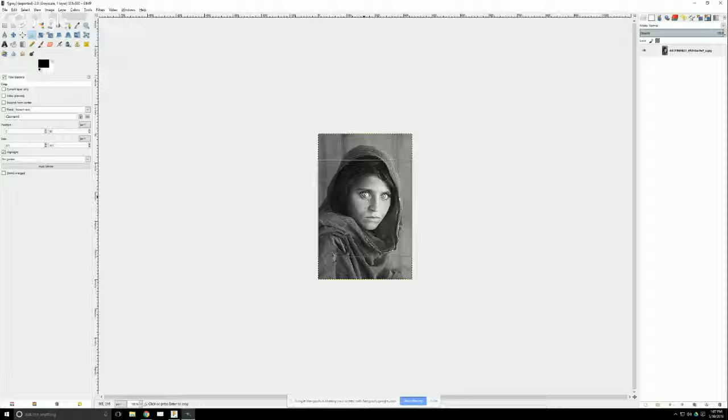Mesh Mixer for this process is better when you use a square image. So I'm going to drag that down. Now I'm just going to click on the image to make the cut, and I'm going to say export as gray square. Great, so we don't need GIMP anymore. We'll get rid of that and this.

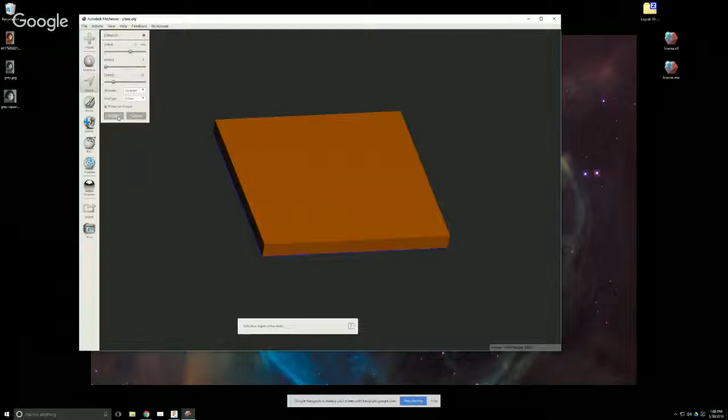I'll bring up Mesh Mixer. Expand this out a little bit. And maybe we'll just start with a plane right here. It says import plane, and this is infinitely thin. So what I want to do is select the whole thing and extrude it out a little bit. If I press W, we don't have very many triangles here.

So I go over this in the Mesh Mixer class, but I'm essentially going to remesh this maybe a couple of times to make it really, really dense. The whole point of this is to make a very dense mesh to start off with, which will then have the picture pop out of it. So I remesh this a couple of times. That's a pretty dense mesh.

That's nice. So we're going to go into here to sculpt, to surface, and let me get rid of these other ones that I did. So we're going to go down here to sculpt, to surface, to stencils, and press the plus button right here, and navigate to where I saved this, and I'm going to select the gray square. So now in stencils, we can click on this image. I'm going to make my brush bigger.

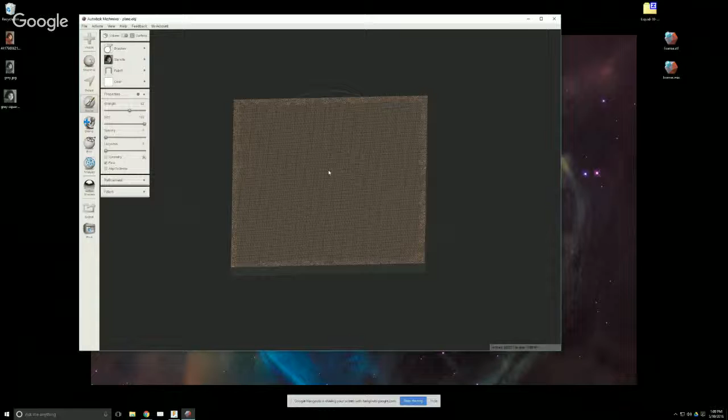And I'm going to go to maybe draw 3, like this, turn down strength a little bit, and click and see what happens.

If I turn wireframe off, you can see that from the front, that is kind of the girl. And if we zoom in here, you can see that it is kind of bumpy right here, but it is definitely the girl when we look face on. I'm going to undo that and go back in.

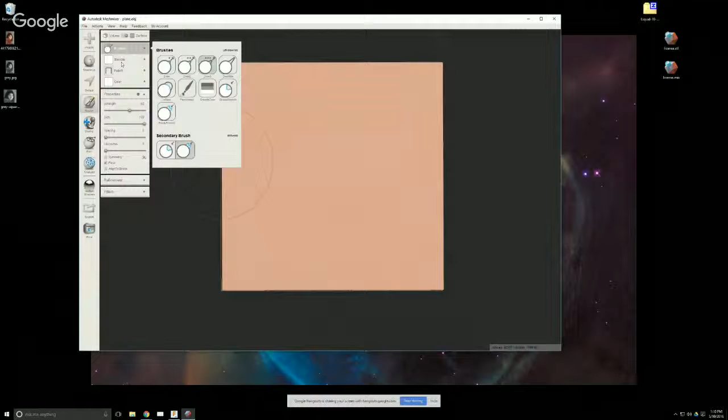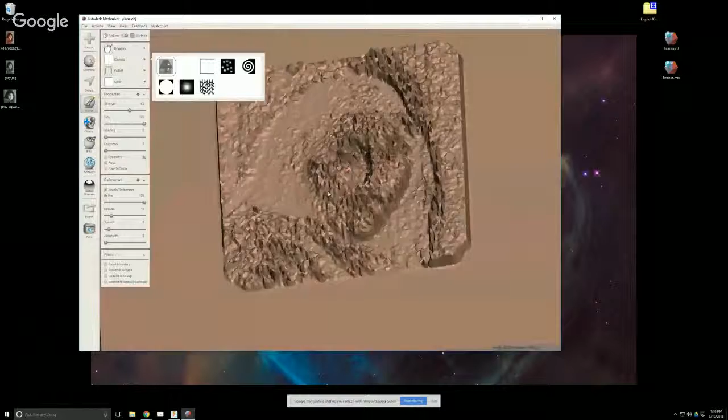Under refinement here, I have reduction turned down. I could reduce it a little bit if I don't want that much smoothing, and then try this again and pop her out like that. So that is definitely 3D printable, except some of these things might be pretty small, right, these little spires, but this is definitely something you can use to create all sorts of different patterns on your mesh. If we make this smaller, we might be able to see the detail a little bit more.

Right, her eyes are kind of popping out. So what this is, if you remember this square right here, let me drag this over, you can see that her hair is dark and her eyes are white. So in this, everything that is dark is staying down and everything that is light is popping out. If we do this stencil, you can see that it's dark on the right-hand side and light on the left. So when we do this, it comes out following that. The light parts come out, the dark parts stay down.

So that's one way to do it. But this isn't the best way to do it. There's a couple different ways.

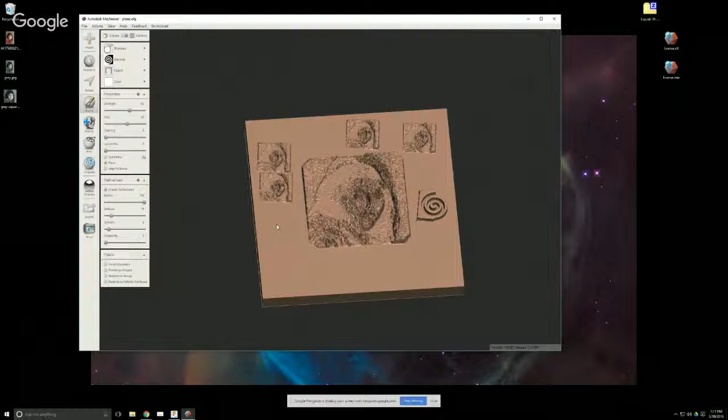If you have a 3D printer, you can open up this free slicer program called Cura that slices 3D models. If you go to File and Load Model, you can actually select an image, and it asks you how tall you want it to be, 10 millimeters, with a 1 millimeter base, and for it to be 99 by 99 millimeters.

And maybe do a little bit of smoothing, and we could have a 0.5 millimeter thick base. You click OK, and it brings in the image, and it actually does a little bit better job than Meshmixer.

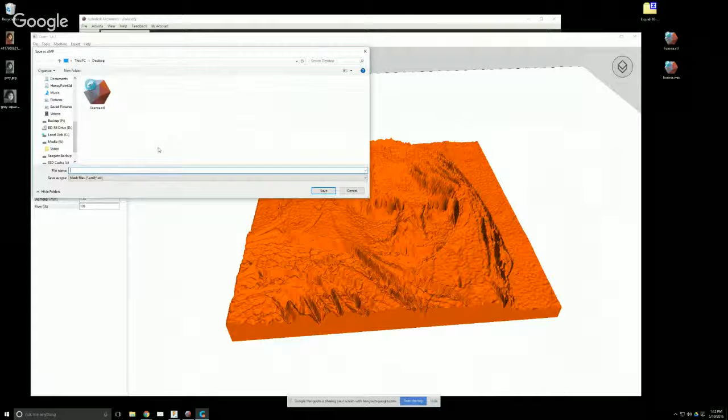And this is just a 3D model. So you can go to File, Save Model, and call this 'grayCura.stl'. Then after a second, it will load up as a 3D model, and now I'm opening it in Meshmixer.

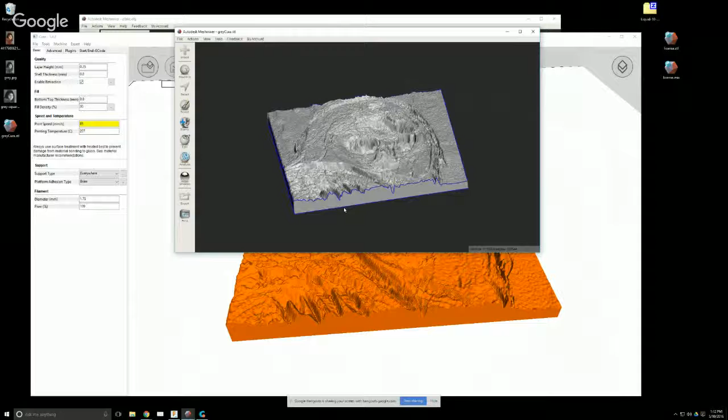Meshmixer will think about it for a little second, and there's the model ready for you to do whatever you want with. Notice that Meshmixer has shown some open boundaries essentially everywhere on here, so you might need to do a little bit of work to fix that, but it is something you can edit as well.

So that is one way to do it. Now the last way to do it is to go to a web page. Let me go here - this is a web page called 3dp.rocks, specifically 3dp.rocks/lithophane.

If you just go to 3dp.rocks, there are lots of different things you can do inside here - ring makers, but also this image to lithophane converter. So you click on this, and you get some options here.

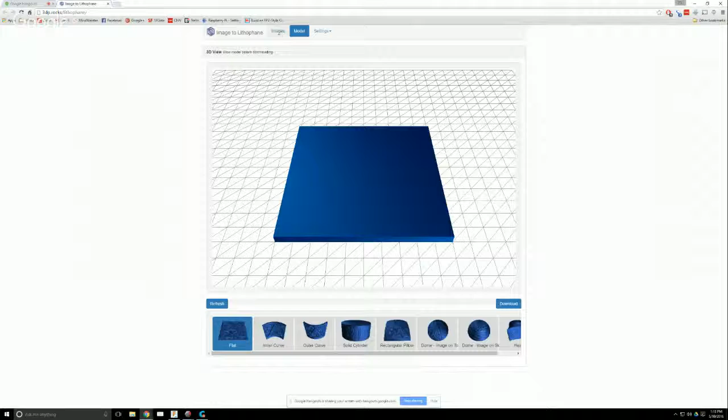If you click up here on images, it asks you to choose a file. So I'm going to choose maybe the square right here. It thinks about it for a second, and then it creates a lithophane here in your browser.

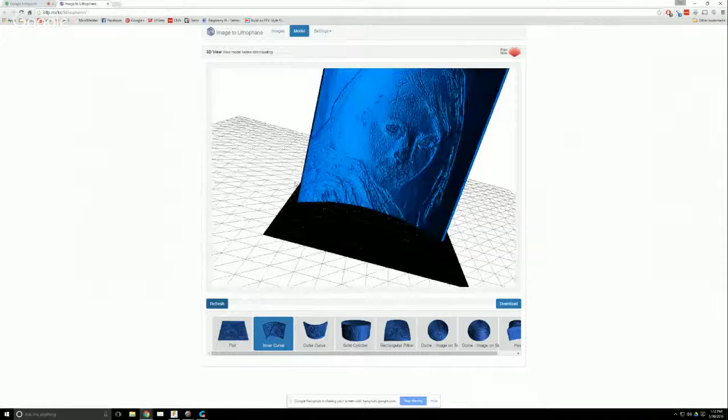You can also do other things, like inner curve, outer curve. So if we click on inner curve and say refresh, it thinks about it and creates a 3D model. And if you say download, it will download it, and you can open that up in Meshmixer as well.

Once it comes up after a second here, there we go. Now, these are probably not optimized for 3D printing - they may not let enough light through for creating something that would be 3D printed, but that is a way to create an image as well.

So hopefully that gives you some options on how to use some tools to create a 3D model out of an image. And then those are just 3D models - they can be used anywhere for anything, just like any 3D model could.

So the other thing I wanted to talk about today, which is something that happened in my own life, was I needed to hang some stuff up in my garage. And since I own a 3D printer, I thought, well, why don't I just create hangers for things? So I did, and I want to show you how I created those and how I went about that.

I have some different examples here. These are safety glasses, and I was just hanging these on a nail, but since I'm a 3D printy person, I wanted to hang these on something 3D printed. So I created a little hook like this - super duper simple, but it just goes on and these hook on like that. And then this gets screwed into the wall. So that's one that I'm going to be talking about.

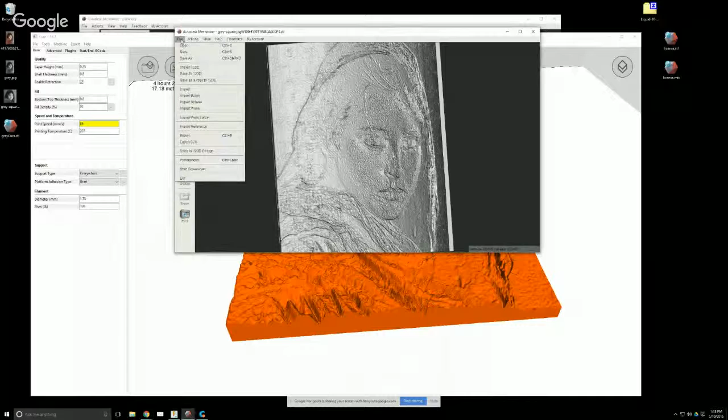Let me share my screen again and show you. Let me start like this, starting with nothing. I'll close all of these Meshmixers down.

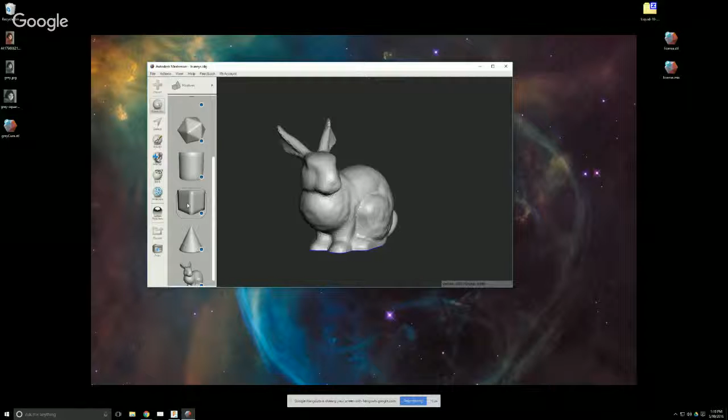Meshmixer doesn't allow you to just start with nothing, you have to start with something. So I said import bunny, but I'm going to get rid of the bunny later. I'll go here to Mesh Mix, down to a cube, and drag this into open space.

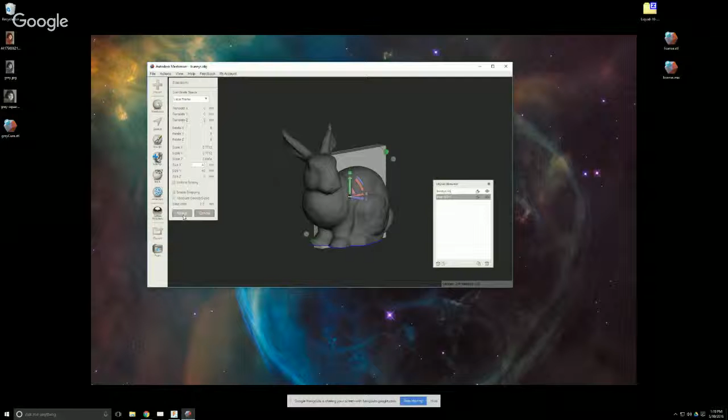Then it asks what size I want. I want this to be 40. It says it does everything uniform, but that's not what I want—I want 40 by 40 by something around 5 millimeters. And I'll say accept.

I can click on the bunny and click the trash can to get rid of it, then click back on this object. That's my plate, what I want to create a hook out of. This was as simple as going to the sculpt tool, to a draw brush, and making sure refinement and reduction are all the way up.

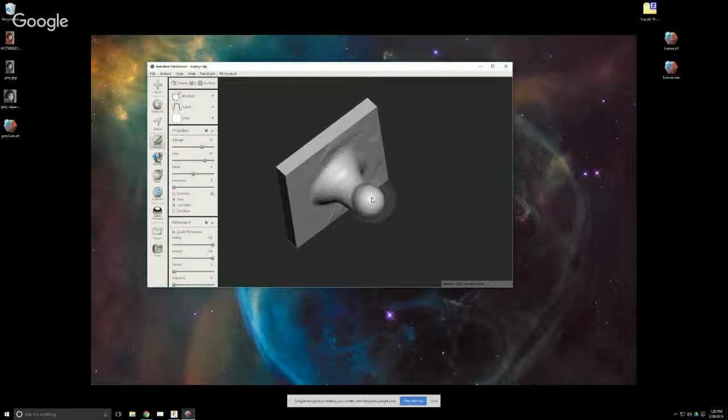Then just starting to click and draw this outwards. If you hold this down, flow is turned on. Holding it down builds outwards. I'm going to hold it down a bit more until it looks proportionally correct, and now go up a little bit like that.

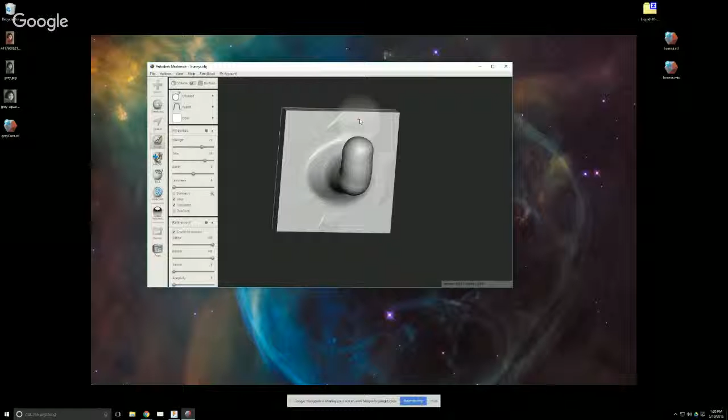If that isn't too good, you can hold down the control key and it undraws, so it goes down, and you can keep refining it that way until you get what you want. You know this is about right because you know this square is 40 by 40, so proportionally it looks right.

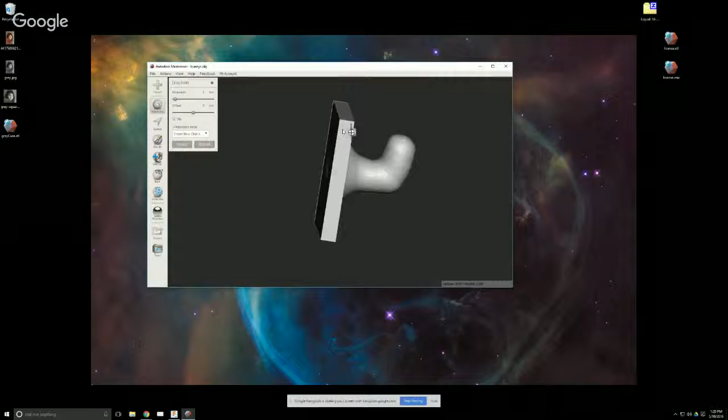We can go here to Meshmixer, and this is a cylinder. We can drag a cylinder onto the model and say dimension, to make this dimension around 3 millimeters or so. It's a little tiny bit off, so you can drag this around and then say accept.

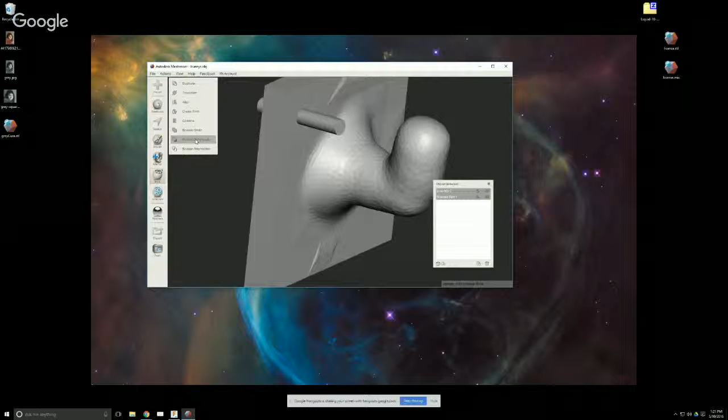And transform this—I'll make it much bigger so it cuts all the way through my object. Select my object, select the cutting tool, and do a Boolean difference. I would have done a bit more remeshing if I were doing it for real, but that's kind of the workflow.

That cut a hole through that plate for a screw to go through later. And go back—so that's just a quick overview of how to use Meshmixer to create something organic.

Now I want to use another couple of examples in Fusion to show you how I made those two things, for the vacuum and for the butane torch, because those are a little more complex but also pretty useful.

So let me go into and share—let me bring up Fusion here. I think I'll just try sharing the Fusion window if I can do that. There we go, you can see it. Good.

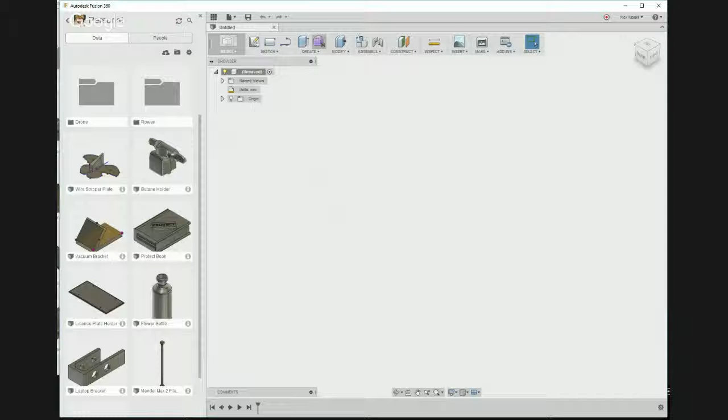So what I did to create the vacuum bracket, you can do this a couple of ways. Certainly the easiest way is to create a sketch and just draw the bracket. You can do this in any way you want. Say the bracket needs to be these dimensions on the wall, and then with a line, the bracket needs to come up here at this angle and then come down.

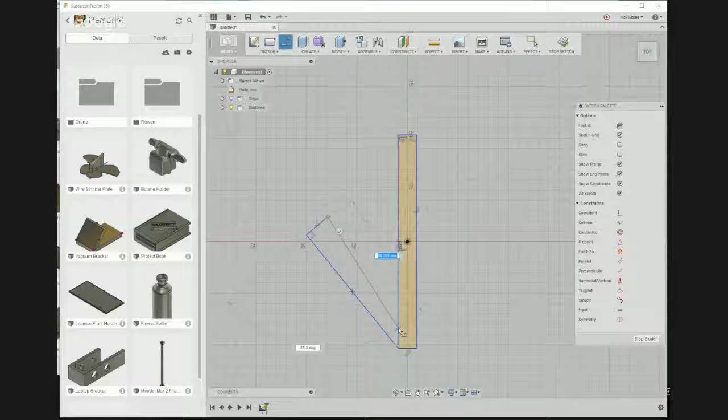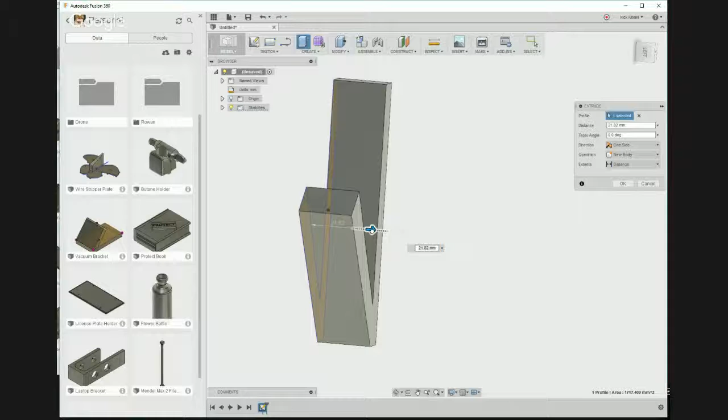And if you want to be real fancy, you could go in and trim this little line in here, like that. So now you have a bracket like this, and you just right click on it and say extrude. This would match what angle you'd need to go into your vacuum that you measured. So that's certainly one way to do it, but I want to show a different way.

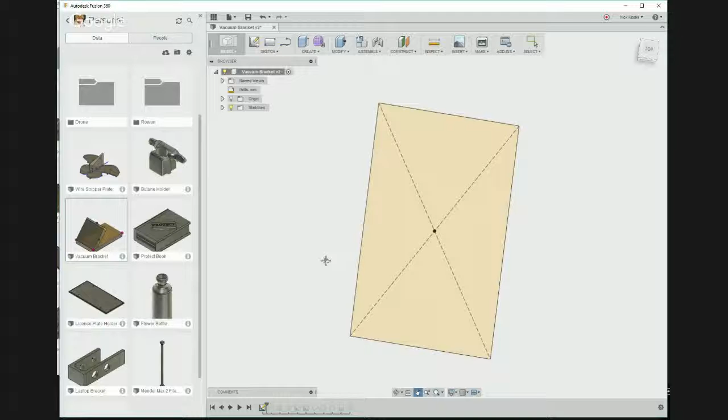So I'll load up the vacuum bracket here. First I started with what I wanted to go on the wall. And next I extruded that out, right? So I started with a sketch and then I extruded that out.

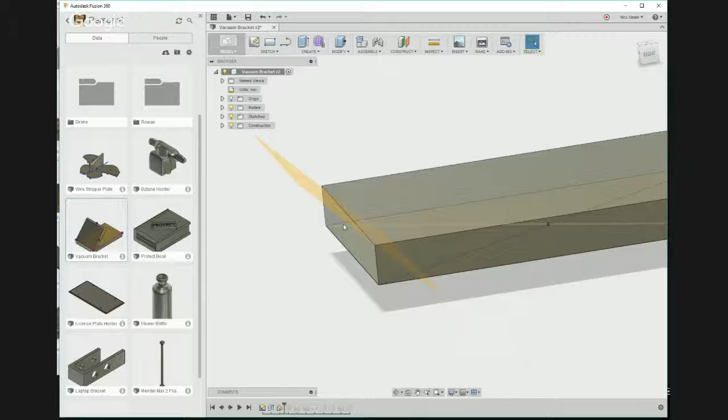And then I created a plane at an angle. I knew I wanted this to end up somewhere over here, so I used this edge down here and went to construct plane at angle. I made this plane at a specific angle that I thought would work. And then I created an offset plane from this plane, so I moved this plane out.

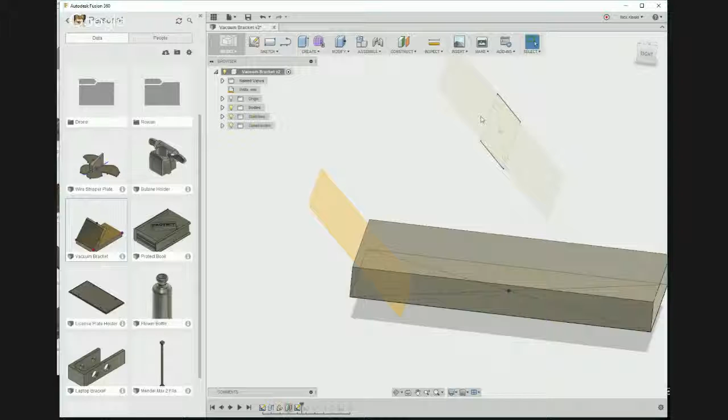I drew the end result on this plane, what the end of the bracket would be. I drew a square on the bottom of this bracket, the bottom of the wall plate. And then I did a loft, lofting those two things together. Then I added some nice things like little fillets down here to make it a little bit stronger of a material, and up here to make it a little bit nicer.

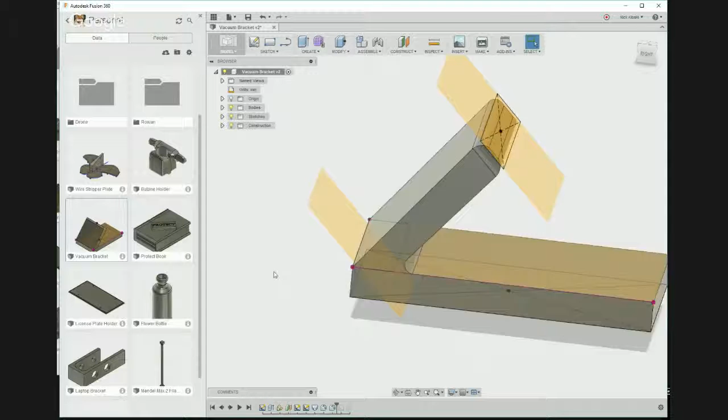The reason I did that was if I wanted some sort of swooping transition, you can do that with a loft. You can loft from this plane to another plane to another plane to another plane if you wanted, and have it kind of be nice and wavy. You could certainly do this with just a side profile sketch, but I wanted to figure out how to do this with lofting, which is why I did it that way.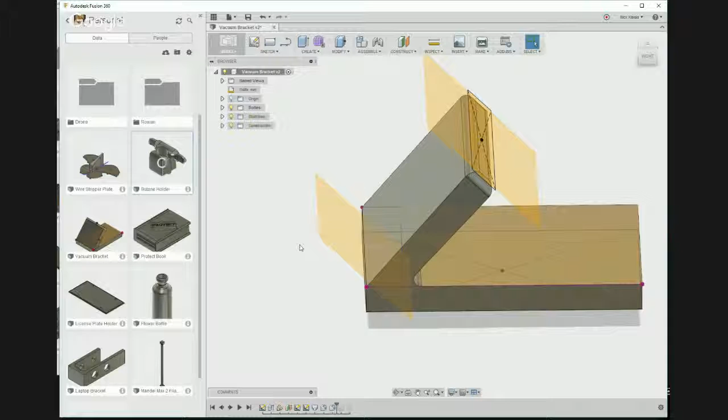So let's go into the butane holder, which was the torch. Let this load up for a second here. There we go. I'll get rid of the vacuum bracket. So this was the torch holder.

This was actually not that hard to do. What I did with this is I knew I wanted the torch to be upright. So I just took my digital calipers and measured what width it was. This looks about 25 millimeters, a little bit thinner on this side, about 20 millimeters. And then I knew I wanted it to go up maybe about 40 millimeters, so it was a nice secure connection.

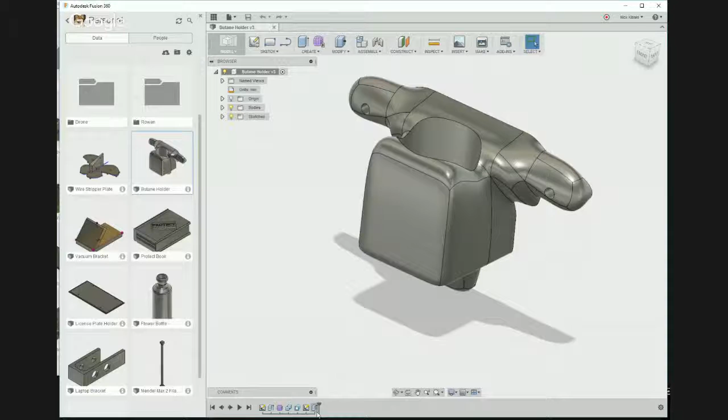So I'll go back and share my screen. That's what I did here. I started off with a sketch, let me go back to the beginning here. This is the shape, this is an ellipse, the shape of the butane torch.

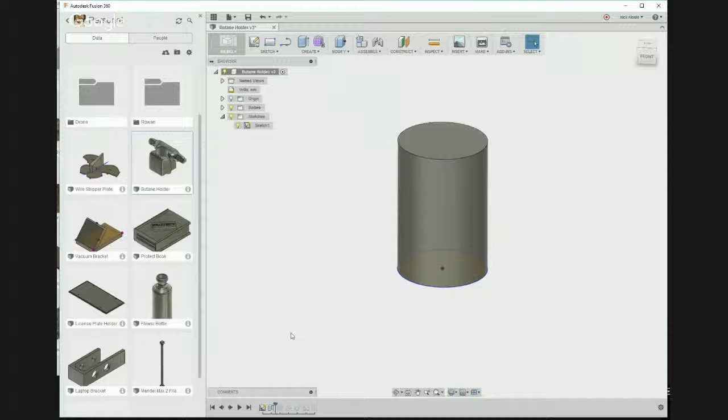I then extruded that out. I don't need to make it look like the torch because all I care about is just the shaft of it, the part that will be cut out of the other object to the length that I want. And then I went in and created an object in the sculpt environment.

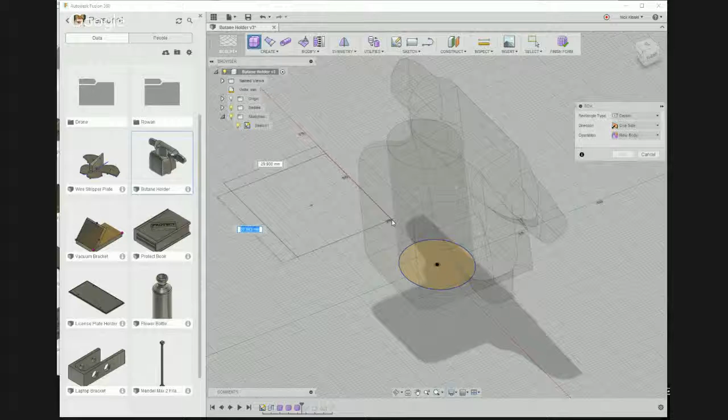I just started off with a box, kind of like an actual finished form. Let me create a box. So I just started with something vaguely the size and tall that I wanted, and I made it a little bit more defined.

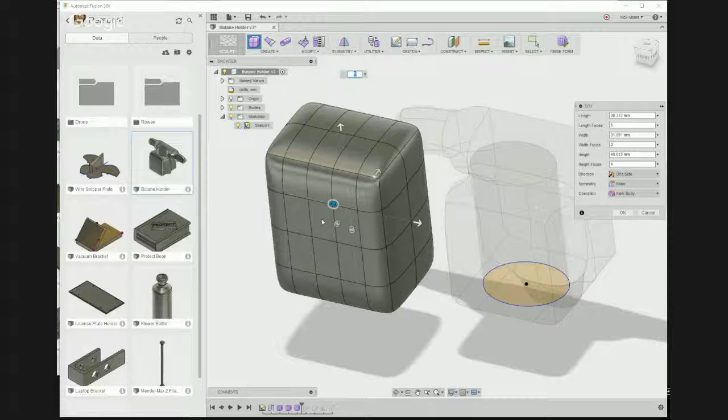Now, best practice with this is that you always have an even number of faces, because that gives you a line in the center across which to mirror. If we went one more, you see there's no real line here and the mirroring gets kind of weird. So, something like that.

And of course, this would be on top of that circle, so you'd be able to model to that. But I use the trick of selecting - actually, let me turn on symmetry. I want the left and right to be the same.

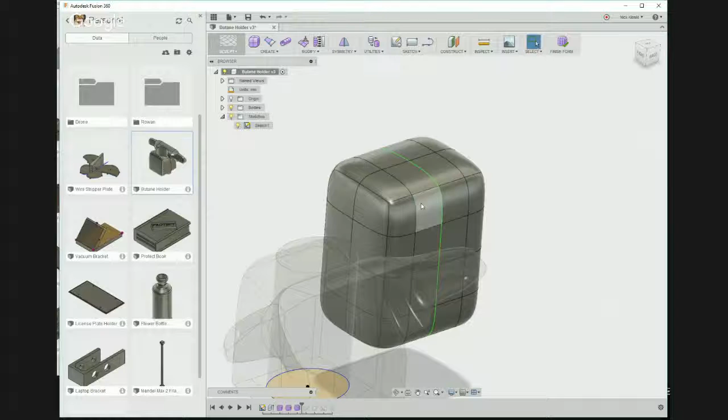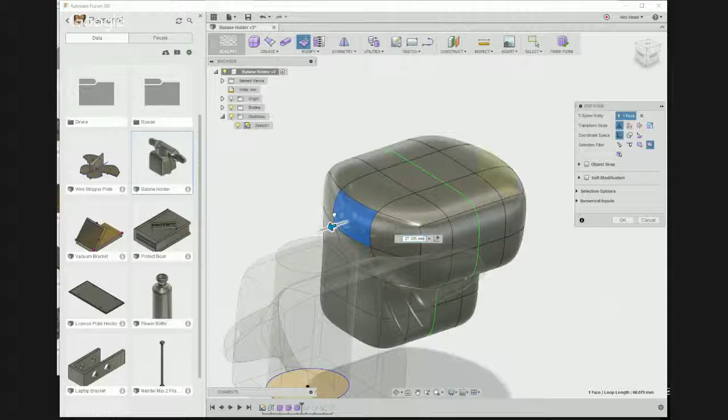So I went into the thing and selected all of the faces that I wanted to modify, went into edit form, and held down the Alt key. When you hold down Alt and move, it starts a new extrusion out, so you're able to create kind of cool effects like this. If you just pull it, it just opens it like this, which you may want. But if you hold down Alt, it creates a new face off of that, and you hold down Alt again, something like that.

So I just went down and created a shape that encompassed this entire cylinder the way that I wanted to. And let me hide this kind of test body that I did.

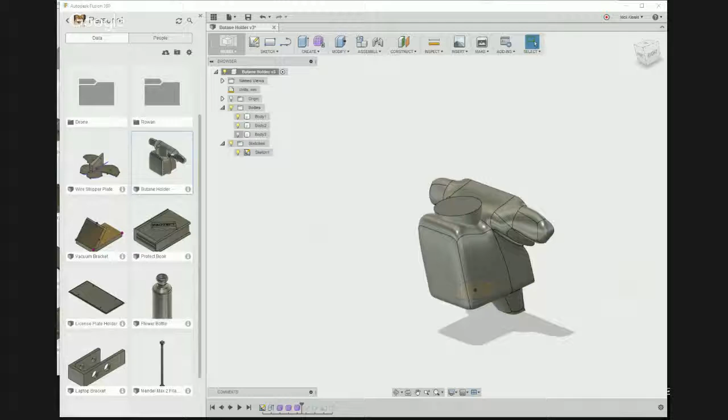And then I did a combine with cut. So I had this cylinder inside of here, and I cut that cylinder out of the body.

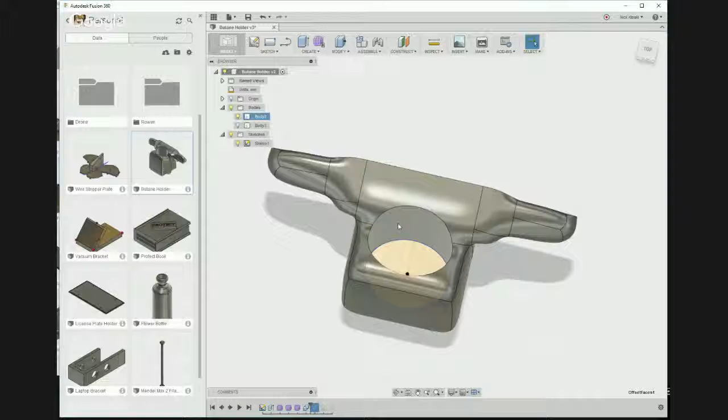And then here's something that I did too. I said offset faces. So this was a perfect match to the butane holder, and I don't want that - I want it to be a little bit bigger. So I could certainly go into the sketch and change it, but sometimes you want the sketch to be perfectly what you're modeling in the butane holder.

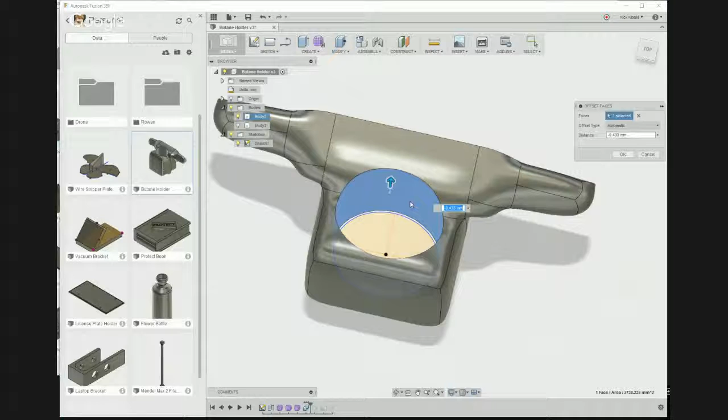So I just clicked on this. I right-clicked on the side of this kind of shaft and said press pull, which allows you to make things a little bit bigger or smaller. So I just made this a tiny bit bigger, maybe 0.3 millimeters around, a little bit larger, so that when I 3D printed this, I would have a little bit more room.

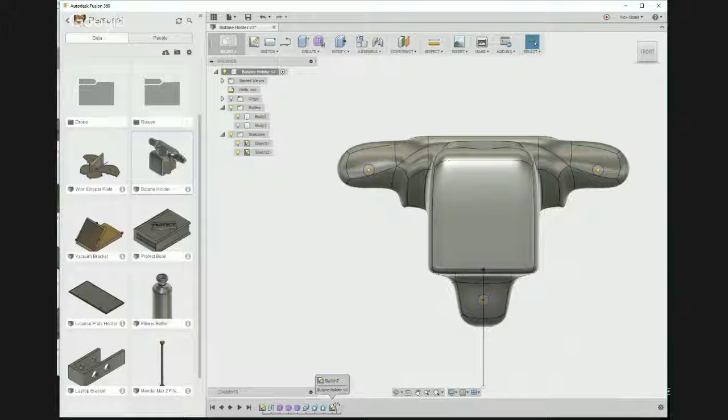So that's what I did, and then just did the other little cuts. What I did here was look at the sketch from the front. I created a sketch right here of these 3 holes for the screws, and then extruded those out to cut, essentially by selecting them, right-clicking on them, and saying extrude.

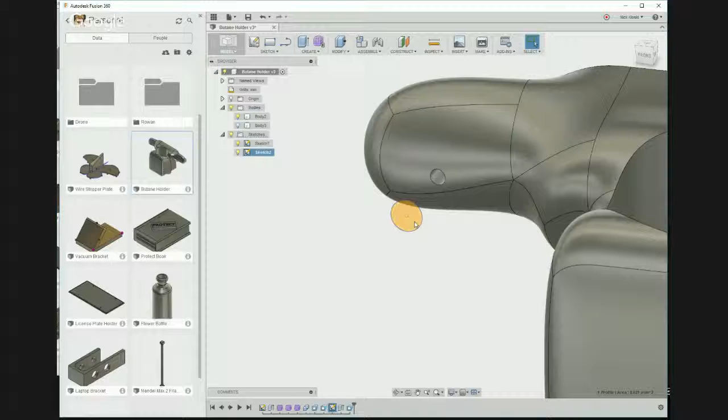And then as you drag them in, if it were actually going to be - well, here, I'll show you. I can press pull this one to make it smaller. And now when I extrude this, it creates until it hits something, and then it says you probably want to start cutting now, so then it cut. I did that for all 3 of those holes to create the screw holes.

And that is how I created the butane holder. And then all of those mounted on my wall, and I have some really awesome things. You notice that you don't have to create things that look like this, right? Just a little hook totally works and is nice, but this butane holder is really nice looking.

It has these weird little bevels on it that you can see, if I can show it, that are part of that T-spline sculpt shape. It's a really interesting shape, and it looks beautiful on my wall, and it fits super duper perfectly with this butane holder. If I go back, actually, I want to show you just one more here in Fusion.

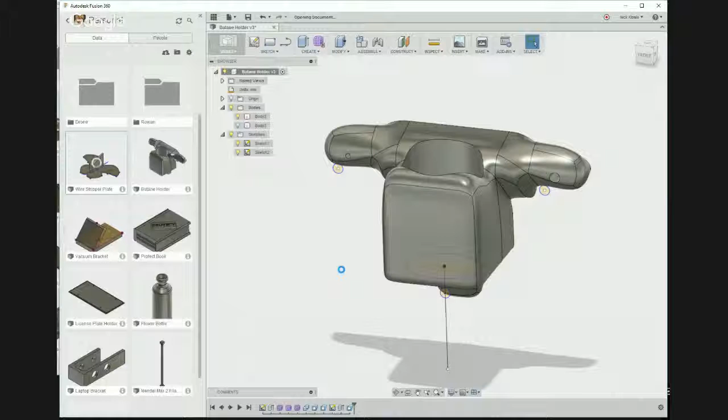I created a little mounting block for some automatic wire strippers, where you just put the wire inside and it automatically strips it for you. It's like black magic.

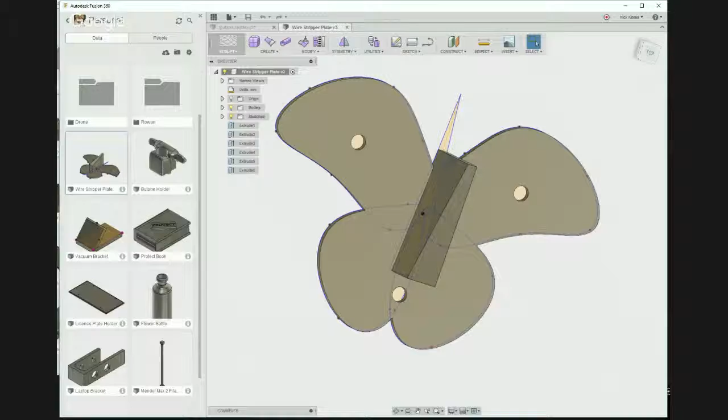So this is kind of a triangular or trapezoidal shape. Right here is what holds the strippers on the wall, but I created kind of a little butterfly shape around it because I just wanted it to look pretty on my wall. Like, why not? And that is the real awesome thing about 3D printing, is that you can create anything.

So if you're going to create anything, you can certainly create things that are utilitarian, but if it just takes you a couple more minutes to create something that's beautiful, why not, right? That's what 3D printing is about - unlocking your creativity and learning the tools so that a couple little brushes, or going into Fusion and doing a little bit of work in T-splines, and you suddenly get something that beautifies your environment. Why not, right? That's what 3D printing is for.

And so that's one of the things I really wanted to go over in our tutorial today: how to use these tools from a strategy perspective, using measurements to get certain places. But then once you're done with that, why not look and see how you can make it pretty, or make it something that makes your environment happy and more alive than just utilitarian.